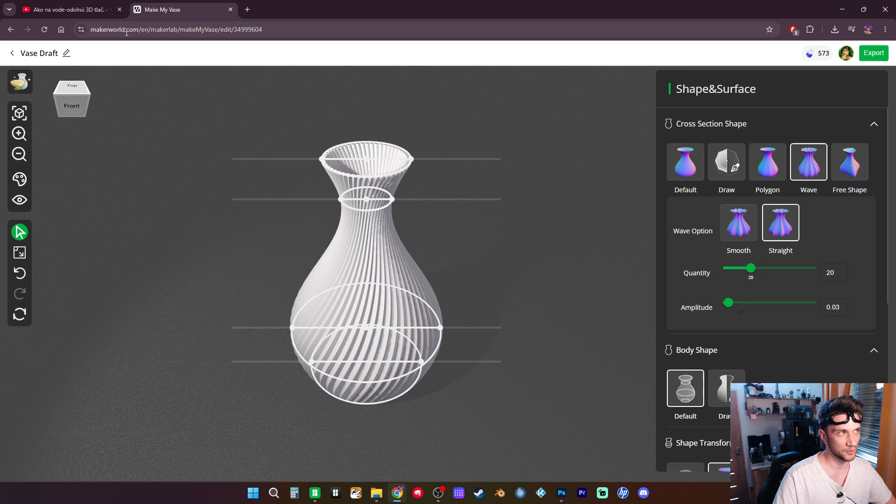Let's dive in. Alright, so I got a vase here, just a simple one I made in Maker World, Make My Vase Studio, whatever. You're just gonna hit export after you make one, and we're going to open it in Bambu Studio.

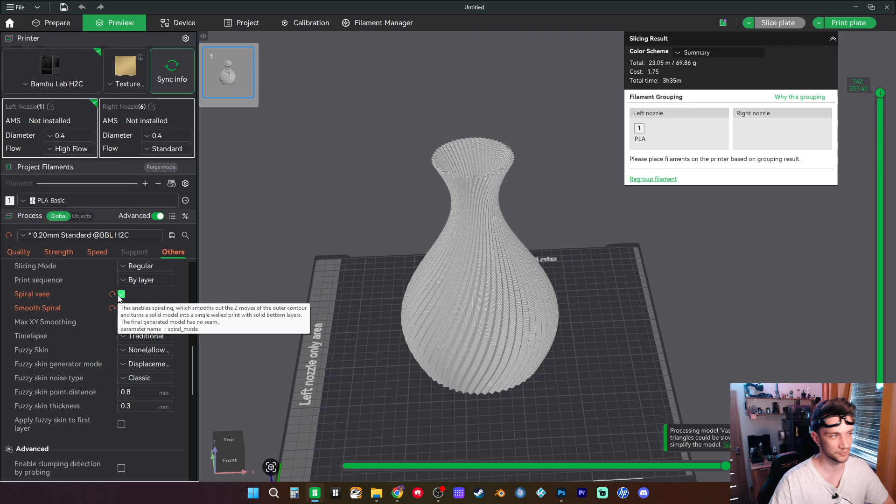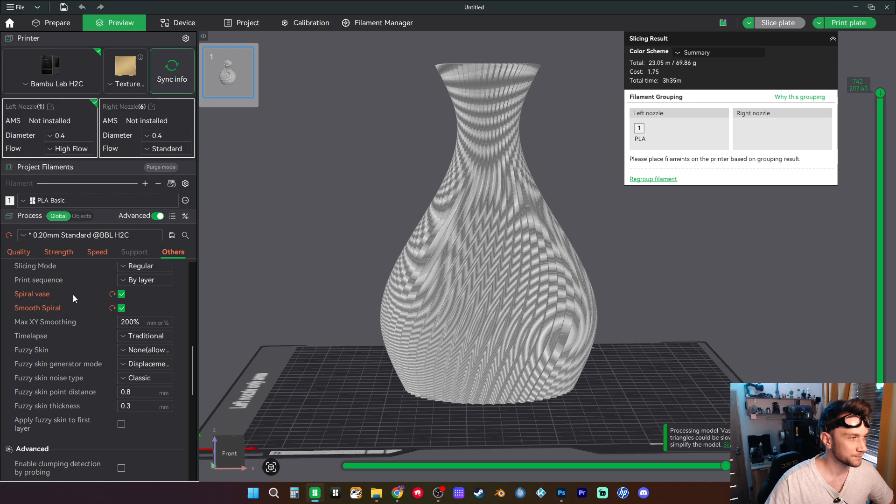All right, here we are, and I got my settings prepared, and I'm gonna show you what I changed and why. First of all, you need to click on Spiral Vase mode. What it will do is make one continuous print without seam, and it also only has one wall. So it will print from the bottom in one continuous motion to the top. That's very important in these settings for waterproofing.

We can also turn on the smooth spiral. It will just make it a little bit better on the corners. That's what I think, I don't know exactly.

Alright, then we go into the quality. We got 0.4 nozzle, so I put 0.28, that's the highest layer height I think for this nozzle. And also we will need to change this to PETG. I don't have PETG set up on my printer now, but imagine that here is PETG, alright?

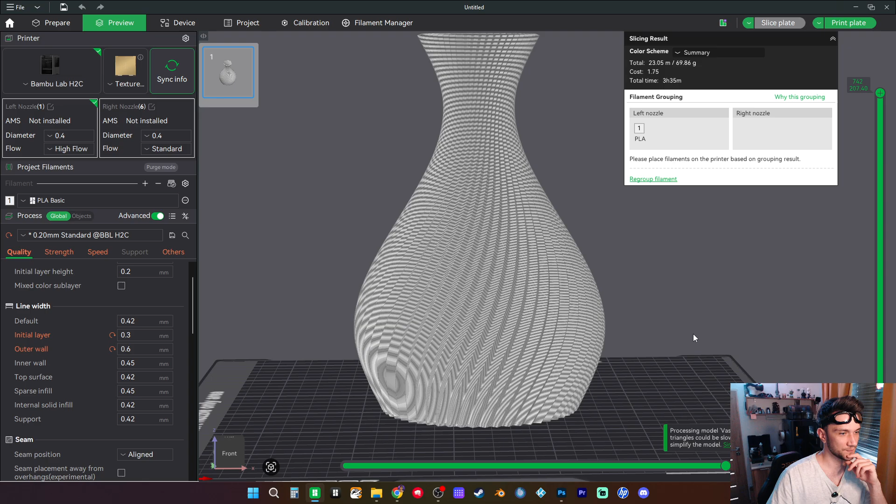So we got layer height at 0.28, then initial layer, that's the density of the first layer. You can put a higher or lower number, you can really try. I tried with higher and it also worked, but I think it's going to work better with 0.3 or something like that, because it made a pretty thick density on the first layer, and that's what we need.

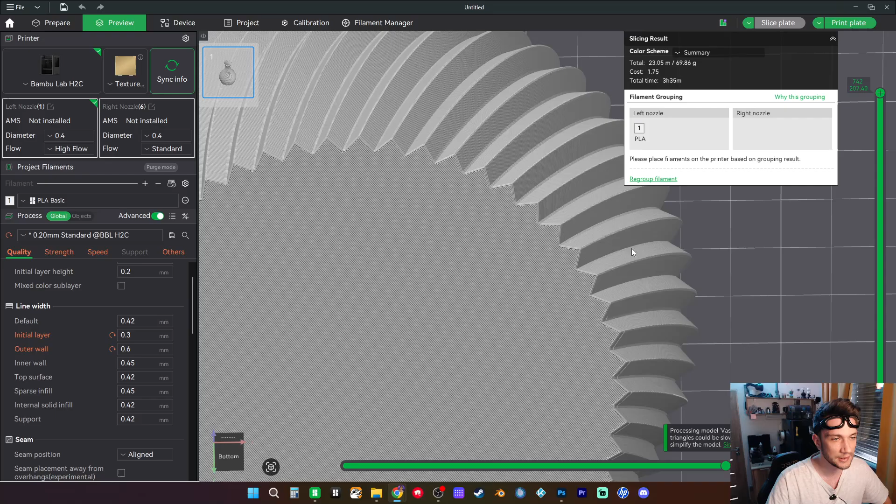So we're going to put initial layer at 0.3, then we need outer wall. If you know, you know—if you turn on vase mode, spiral vase, you get only one layer of the wall. The outer wall setting is for that one wall.

So we need to change this to be a little bit thicker, so I'll put like 0.6. I don't know if we can do 0.7, it doesn't say anything, so we should be able to.

More thick is better, it will do the same. This is also almost the same as having 0.35 for two layers. If you calculate 0.35 by 2, it's 0.7. So we got the same outer wall thickness, that's what we need to achieve.

So let's just put it there, and we don't really have any other settings here. The strength wall loops is set at default to 1 when we enable Spiral Vase, and the top shell is set to 0, and this is another important setting here.

Bottom shell layers — we need more bottom surfaces so we got a better chance it will hold water on the bottom surface. And sparse infill density is 0, set by default.

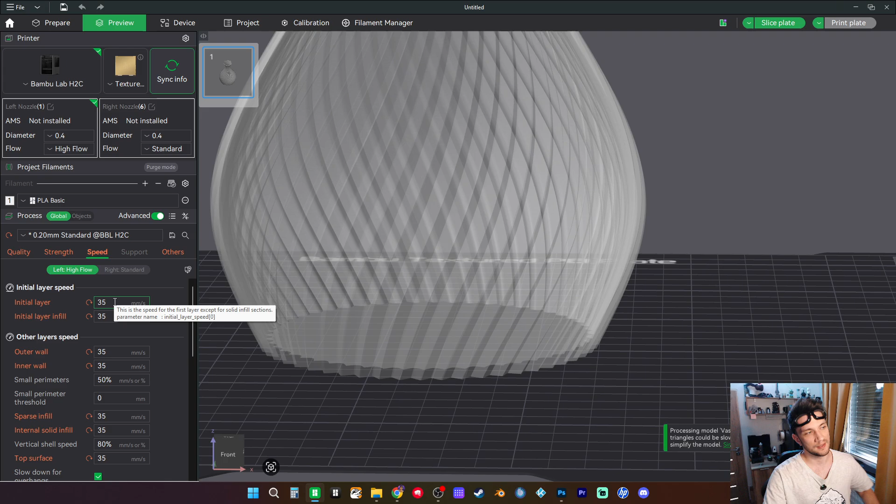And the speed — the most crucial thing is speed. I recommend printing it very slow. You can put any number from 30 to 50, I'd say, but what I tried was 35, or it was 45 when I printed it, I think, and it worked just fine. So 35 should be great for this. I set it up like this everywhere, and that should be it.

I'm gonna hit slice and show you.

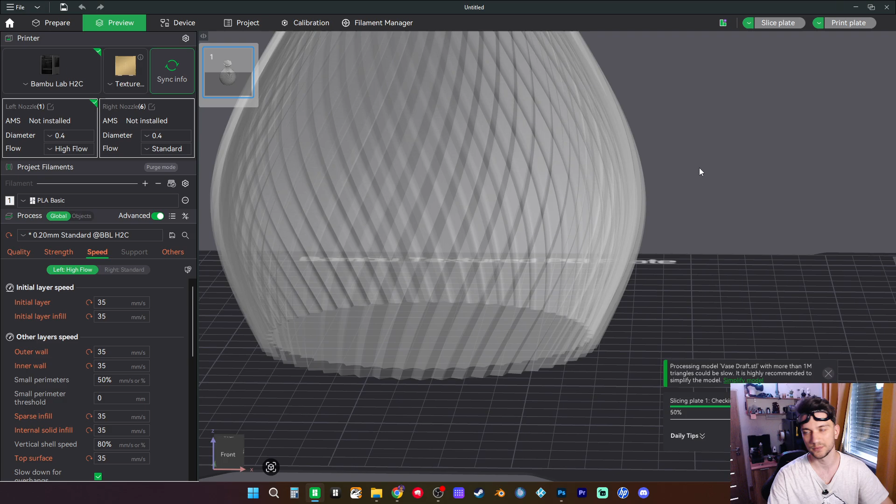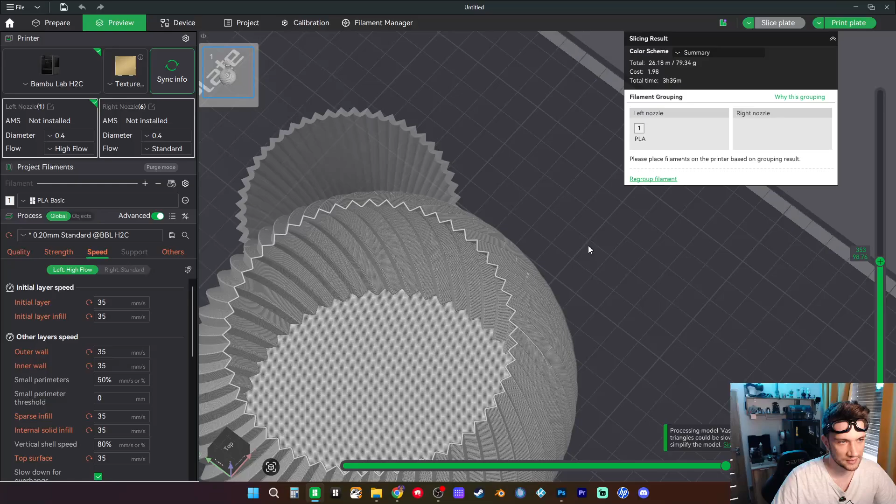So it's also able to make some of the top details here. As you can see, it just made some of the layers that go inside a little bit, and it looks really good. And this is the thickness of the wall. It looks great.

And also we can see the bottom shell layers. We should have like 6 there, I think — 1, 2, 3, 4, 5, 6, and then it starts to print the wall. So that should be good for this.

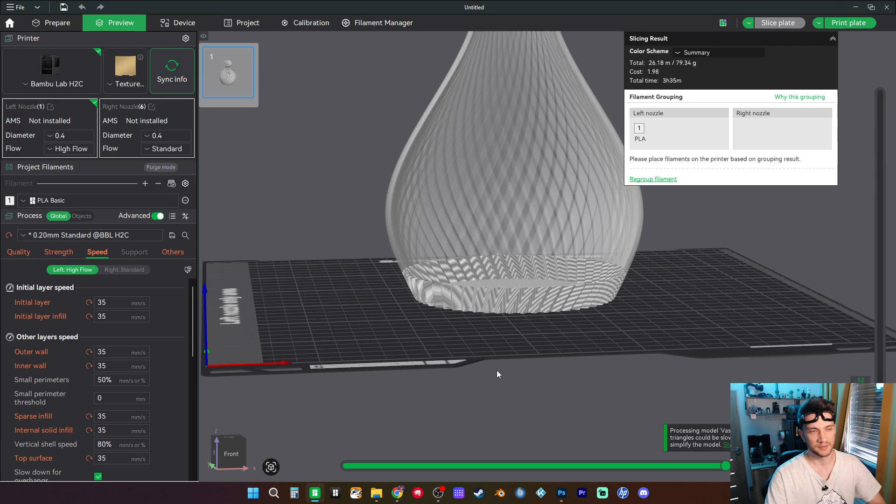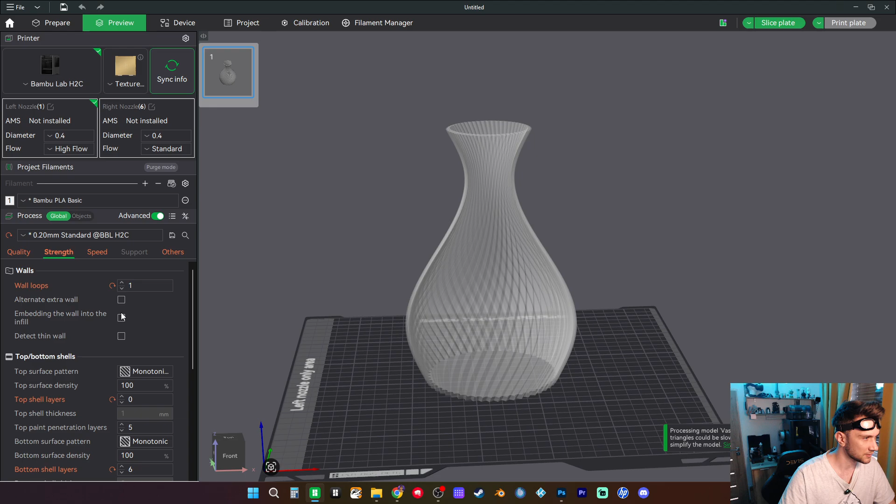And one more important thing I forgot: when you got PETG here, go into filament settings and change the flow ratio to 1.02. That's what I would use, or maybe 1 to 1, only maybe 1. You can really experiment with this. What this will do is push more filament in, so it will fill the gaps. And also I don't know if we can — yeah, we can maybe turn on this too, so it will help fill a little bit more gaps.

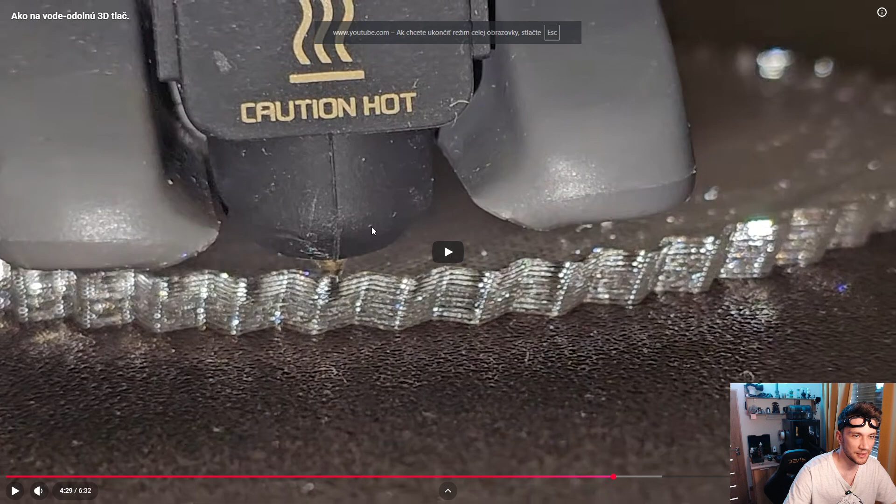So all right, that's the settings that should be good. I also got here the video of what I made about this, and this is how it looked when it was printed. I also tested it with water right after printing, and it was great — it holds the water great. I also tested it on some paper tissues, and it was great.

And one more additional tip: if you just printed it and don't yet have a waterproof model, you can use a clear spray paint that goes inside the model and outside of the model like this, and you can make, I'd say, any model waterproof.